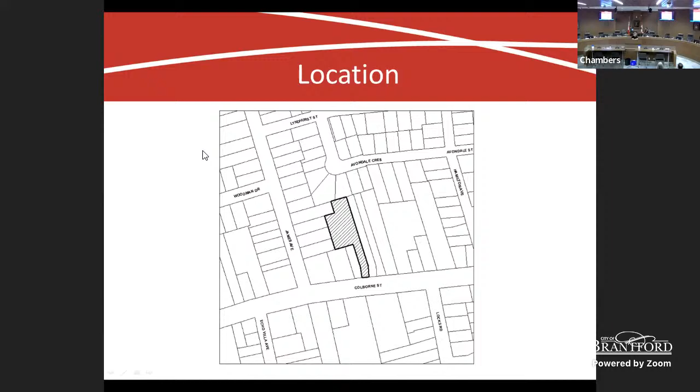The application is to rezone the property from Residential Type 1B (15 meter, R1B) and Residential Type 1D (9 meter, R1D) to Residential Medium Density (R4A), with site-specific provisions to permit a 9-block townhouse development. To facilitate this proposal, a zoning bylaw amendment application has been applied for as per the Planning Act.

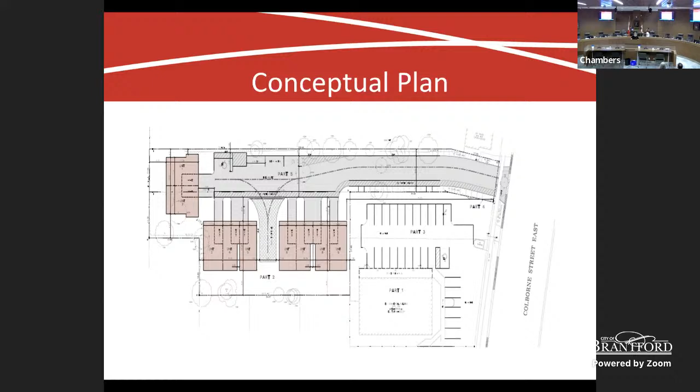When we look at planning policy, there are multiple layers, and I won't get into all of them today, but the ones specific to the city mainly fall under the Official Plan and the zoning bylaw. Our Official Plan was updated in 2021, so it's relatively new. The intent of any official plan is to provide a framework of goals and objectives for the city that provides land use designations and policies, which will guide future development.

It is the intent of this plan that the lands within the intensification corridor provide significant opportunities for creating vibrant pedestrian and transit-oriented places through investment in infrastructure, residential intensification, infill, and redevelopment, with particular attention to urban design. The intensification corridors are intended to strengthen transit routes between major nodes of commerce and employment within Brantford, and are to be connected to the active transportation network, available for bicycles, etc.

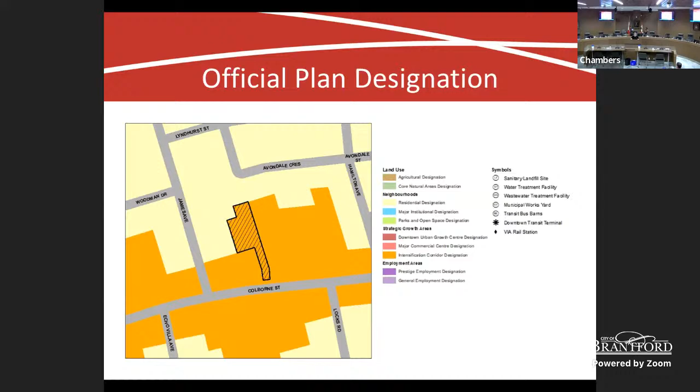When it comes to zoning, that's effectively what puts the Official Plan into effect. It states how land may be used, where buildings and other structures can be located, the types of buildings that are permitted, and how they may be used. It also regulates lot sizes and dimensions, parking requirements, building heights, and setbacks from the street.

In this case, the parcel is currently zoned R1B as well as R1D. These zonings permit single detached dwellings, bed and breakfast establishments, day nurseries, home occupations, mini group homes, and accessory uses to those, fairly similar to what would be in the surrounding area, going more toward the Echo Place neighborhood.

The applicant is proposing to rezone to Residential Medium Density, or R4A, and that permits fourplex dwellings, block townhouses, street townhouses, retirement homes, as well as other additional uses.

Bob Phillips from Cohoon Engineering. If you recall, there was a severance probably about a year ago that included the pharmacy next door, and it actually severed this piece of land with the intent of doing a development on it. The parcel that was severed was sold to Plenitude, and that's where this proposal came from.

I think initially there was some talk about just some single families on this, but through the requirements of the planning department and the Official Plan of the City of Brantford, there was talk of a little bit of intensification, and that's where we went from about 5 units to 9 units.

This is a proposal that we're happy with. We don't want to change it. We want to just go forward with the 9 units on the property.

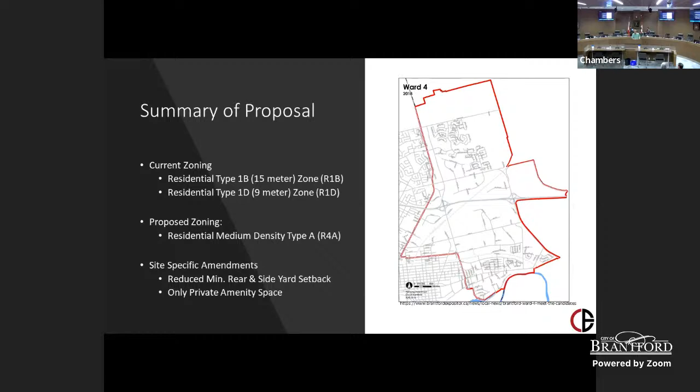I think Nicole's done a good job summarizing what the current zoning is on the property. It's a single family type zoning, and it's split, so that really needs to be addressed in some form or other, because it has very small lots, like 9-meter lots, and it has a 15-meter zone. But we're moving into sort of a medium density type zoning for the whole property.

I'll figure this out.

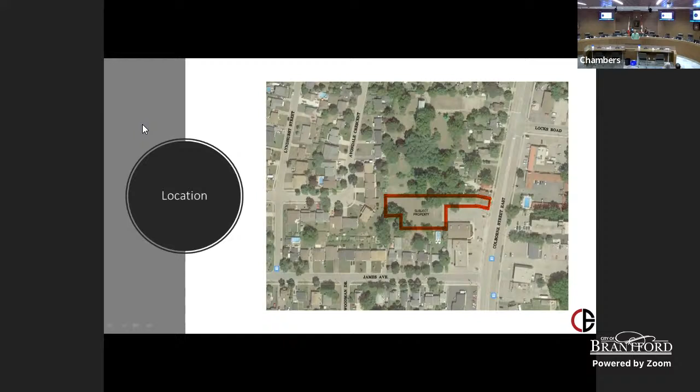There's just an aerial view showing the context of where the property is in the area. It's located right beside the pharmacy on Colborne Street.

There's our proposed site plan for 9 block townhouses on the property. What we've done is highlighted each of the units, and we can give you a view of what they're going to be like if we get all the approvals. There are 2-story units on the property, and that's what we're proposing.

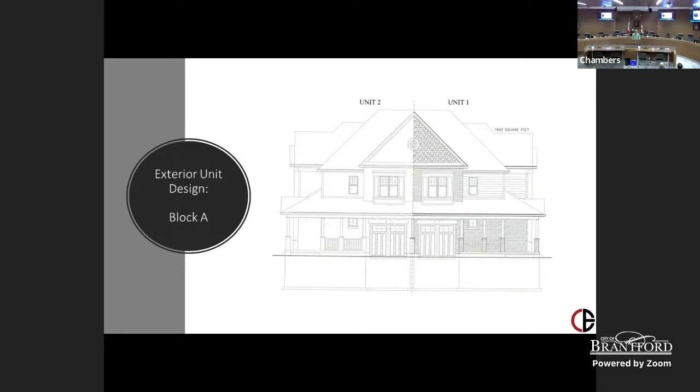Unfortunately those were very light, so we've got building elevations of each of the units we're proposing at this time. Sorry for the quality, it's actually our first time doing this virtually, and lots of times we just come with lots of colored drawings.

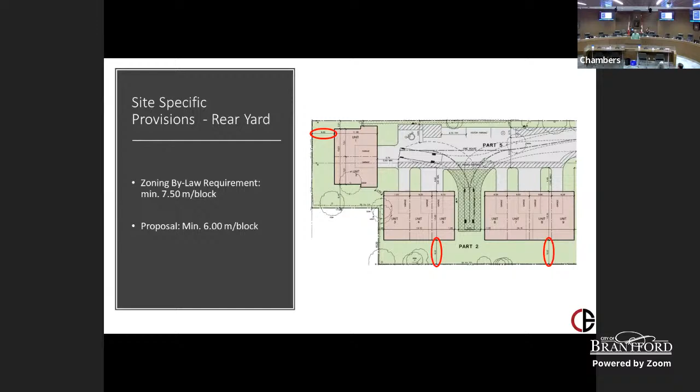We're trying to rezone it to an R4A, which is a medium density zone in the city. There are really 3 provisions that we're asking variance to. One is the rear yard behind the units. This is intended to be a condominium format, so it's not really intended for kids. We think a 20-foot, 6-meter rear yard is sufficient in this case, so that's one of the things we've asked to be varied.

I missed one, sorry. In addition, we're looking to reduce the side yard on a couple of the units from 3 meters, or 10 feet, down to 4 feet, which is consistent with a residential type zoning.

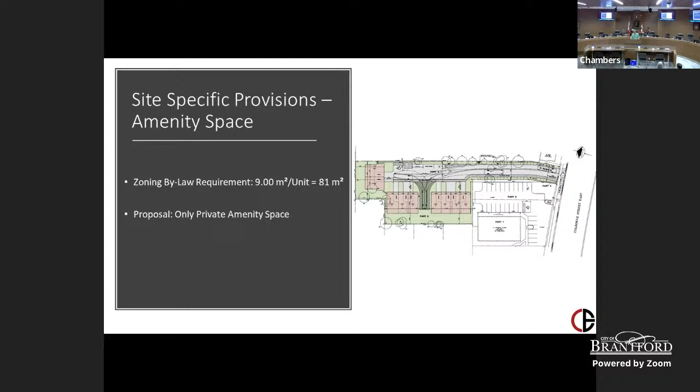The other variance we're looking for is technically it says we don't have any common amenity space, but each one of these units has a backyard and the ability to build a deck, so they'll function just like any other home in the city. Really, that's it—we're here to answer questions and hear what you think of what we've proposed. We'll take it back to the drawing board and make modifications if needed.

I guess at this point I'll open it back up to the councillors to run some questions, or I can stay here.

The question right now that we're clarifying is the rear yard, which is now at 20 feet. I understood that it's going to be 20 feet from my line. Where are you located on the back of the lot? Yes, so it's 20 feet.

And will it be a privacy fence? Yes. How high and what kind of material? It will be a wooden solid fence, 6 feet tall.

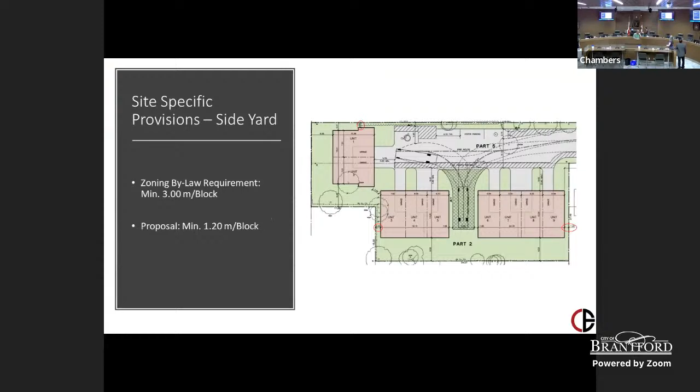May I ask a question in response to the fencing question? If you wanted to bring up the slide, Bob, so we could talk about the area he was requesting the fence length go to. If we could just look at the diagram, that works.

That's good too. So where on the map are you referring to, sir? Actually, what I am referring to is the neighbor here. We would be going to here, yes, and she is requesting it. We don't own that land. No, I know that, but the fence will go down that side yard. Right, along the side of the property. That's right, that's what I kind of figured too.

Another question that was just brought up is the level of the land. There's a bit of a retaining wall behind Norm's house. Is that going to be leveled with that? I don't know, there's a fence there, but you may have to be in consultation with them. Yeah, I'd be happy to. They'll be on the back, and I'd be happy to, but I'm probably jumping a bit ahead of myself here.

What we're doing tonight has to do with land use. The next process is site plan approval, and those nitty gritty details are what happens during site plan approval. I'm sure the councilors will not forget the comment you've raised.

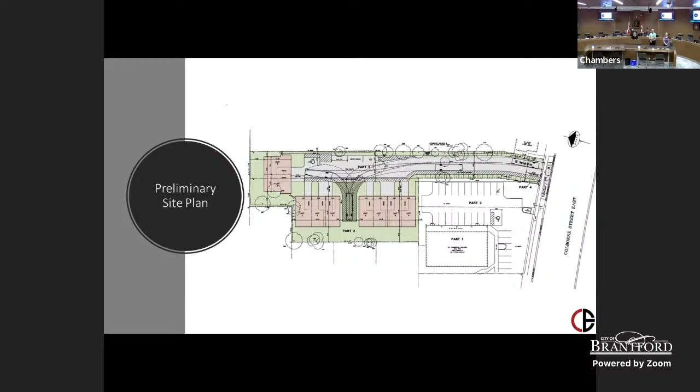No restrictions? Bob, could we put into the plan that the decks will be no bigger than a certain size? Under the current zoning bylaw in the City of Brantford, you're only allowed to encroach into the rear yard setback by 2.5 meters, just a little over 8 feet. So fundamentally it's an 8-foot deck off the back, and that's the standard bylaw in the City of Brantford.

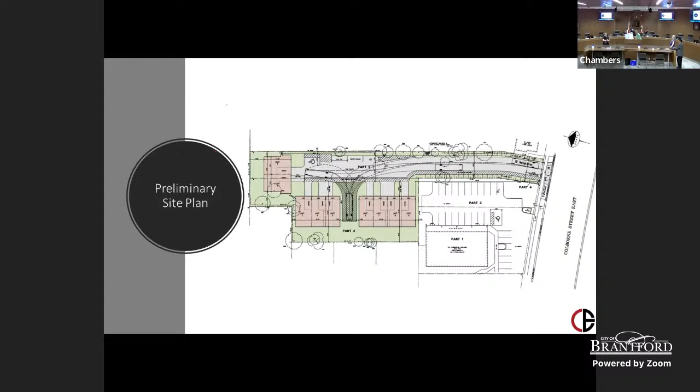It's a very small space, so with the condominium, where will there be parking? The question is in regard to visitor parking because of the small build. Basically, these units all have integral garages, which means they have space in the garage, a space in front of the garage, and then some visitor parking along the east property line.

I can provide some additional planning clarification as well. We do commonly see requests for parking deficiencies, but this application actually isn't deficient in parking. It does meet the parking requirements for the proposed R4A zone, which includes, I believe, 1.5 spaces for townhouses, including visitor parking in those front spaces. So in relation to other applications, yeah, it does meet the zoning as prescribed.

No balconies on the back of the houses? Will there be balconies on the back of the houses? No.

I can just add to that as well. Through the zoning bylaw process, in general, typically that kind of design, unless purposely excluded and requested by council, gets addressed through site plan. We do have conceptual designs, not shown here, but the elevations and how it actually gets built out is addressed through site plan, which your councillors are part of. It's not a public process at that finalization stage, but your councillors represent the public through that part of the longer process. Yeah, we see the final site plans to make sure it's as we discussed here, and we get to see that that's happening.